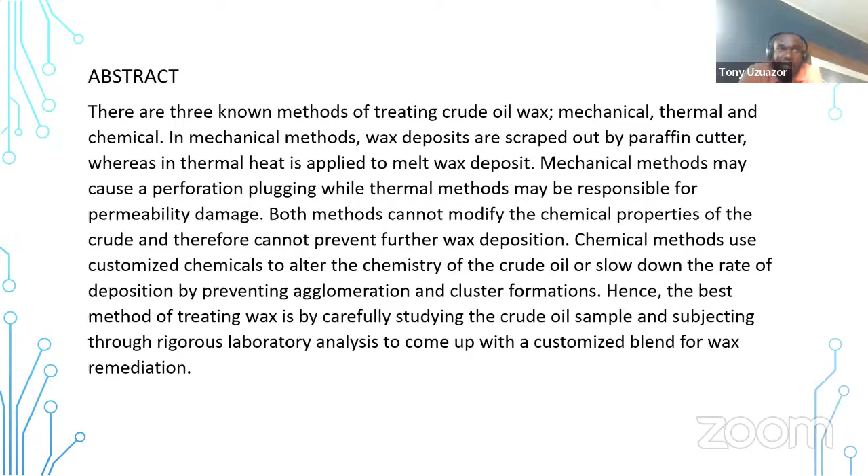Hence, the best method of treating wax is by carefully studying the crude oil sample and subjecting it through rigorous laboratory analysis to come up with a customized blend for wax remediation, which is what we do. Okay, so we don't just pour in our chemical, we do a lot of laboratory analysis on the crude sample to come out with a blend to treat the waxy well.

So for introduction, I wrote here, crude oil wax is common to the oil industry, and each year a lot is burnt on manpower and resources to curb it. Waxy crude presents significant problems and challenges during production, processing, storage, and transportation, which in turn affects profitability. The high pour point, viscosity and wax appearance often result in pipeline blockage, pump failures, and increased operating costs.

To mitigate these problems, we propose the use of a continuous customized chemical injection treatment program for the prevention and removal of oil wax in our wells. Our chemical treatment approach has been designed to improve the flow properties of waxy crude, simplify processing, reduce the risk of pipeline blockages, and increase productivity.

Our chemical treatment process is cost-effective, is efficient, and we guarantee that it will help improve the quality of your crude oil. Now, this guarantee we're going to see when Andrew comes up with our case study. You're going to see what we're talking about when we say we guarantee quality of crude and quantity also.

We have carried out extensive research and development, and our team of experts, which include petroleum engineers, flow assurance specialists, artificial lift advisors, expert chemists, and consultants, have years of experience working with waxy crude. Now, let me say this here also. So what we do is not just based on wax alone.

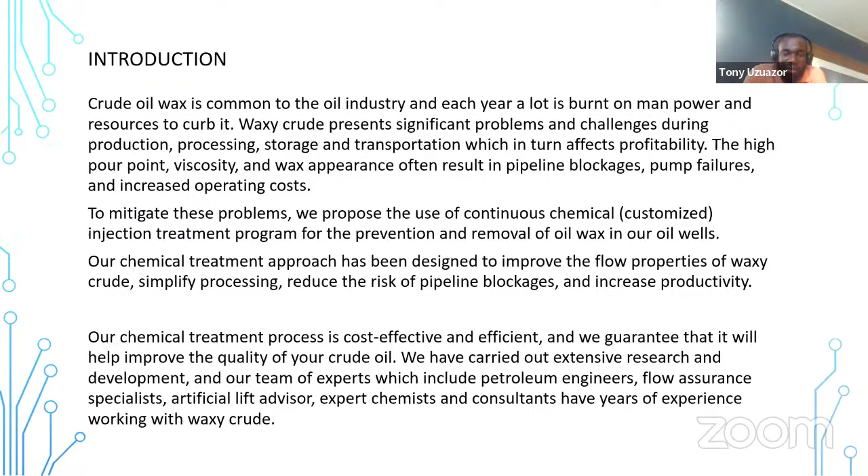Methodology. So I wrote here how we do it. That is what this is about, the methods we use. Sample collection. First, the waxy crude sample is taken from the wellhead or during drilling. Now, two ways we can take samples, either from the wellhead or during drilling.

During the drilling phase of the well, it could be maybe when you stop for DST operation, something similar to taking core samples during drilling. So we can have the sample of the crude oil there. We'll take it and subject it to a laboratory analysis. Taking samples during drilling gets us involved in the design phase.

Now, most of the wells we're going to talk about today are already drilled and completed. So nothing can be done except you want to pull out of hole and redesign. But when the well has not been completed, once we identify that it is a wax producing well, we can quickly come in the completion phase to input one or two completion jewelries that could help us easily mitigate wax.

So that's what it is. So the first thing here is to collect a sample. We'll take a sample, whether from the drilling phase or whether it's an already completed, flowing well.

We take a sample and then we send to our lab. Laboratory analysis: number 2. The crude sample is sent to a laboratory in the US for rigorous study and analysis. 3. Chemical treatment phase. A customized chemical is produced and formulated based on the results of the laboratory analysis for injection through a customized skid.

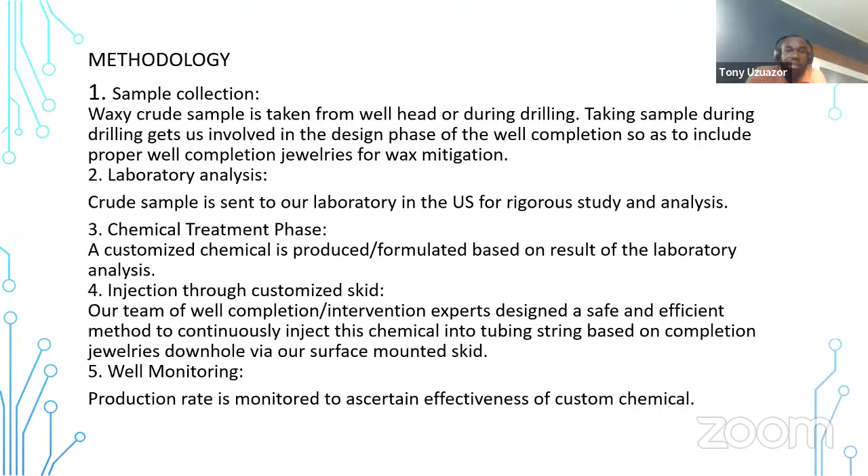So what this means is that we have a skid mounted on surface like a pump that gives a dose when we have decided which best method to use to deploy the injection process. The surface mounted skid gives a dose through whichever channel we decide to inject from. Well monitoring phase. Production rate is monitored to ascertain effectiveness of the custom chemical. The benefits of customized chemical.

One, cost reduction. I know there's going to be a lot of questions on cost, because I know people have their various ways of doing this. We'll come to that anyway. We have proof that it is cost effective. So in the long run, I wrote here, increased flow efficiency will lead to reduced energy consumption and maintenance costs associated with mechanical cutting and heating and insulation systems.

Also, by maintaining fluidity, expensive mechanical interventions like pigging are minimized. So a lot is going to be taken away from your cost of running your operation by the time we successfully install our system. Two, enhanced flow efficiency. By treating the wax and altering the rheological properties of the crude, the proposed chemical treatment program will improve flow efficiency, limiting operational interruptions and further reduce nonproductive time.

Okay. Thirdly, improved product quality. The customized chemical treatments will ensure the production of high-quality crude oil, minimizing the presence of contaminants and impurities commonly associated with waxy crude. This will positively impact downstream processes and increase the value of the final refined product.

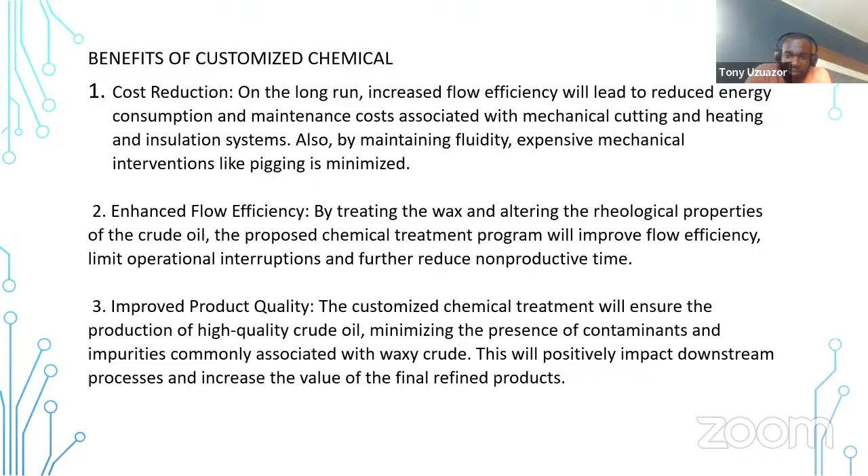Other benefits are listed below: capacity to dissolve the organic deposits, prevents gelling of oil in cold climates, acts as a good corrosion inhibitor, prevents wax agglomeration, makes heavy or viscous crude flow, I've said this before, makes it difficult for the precipitated wax to stick to the wall, has the ability to coat and create a surface film on the internal diameter and the outer diameter of the production tubing, thereby making it difficult for wax deposition to adhere to the wall of the tubing.

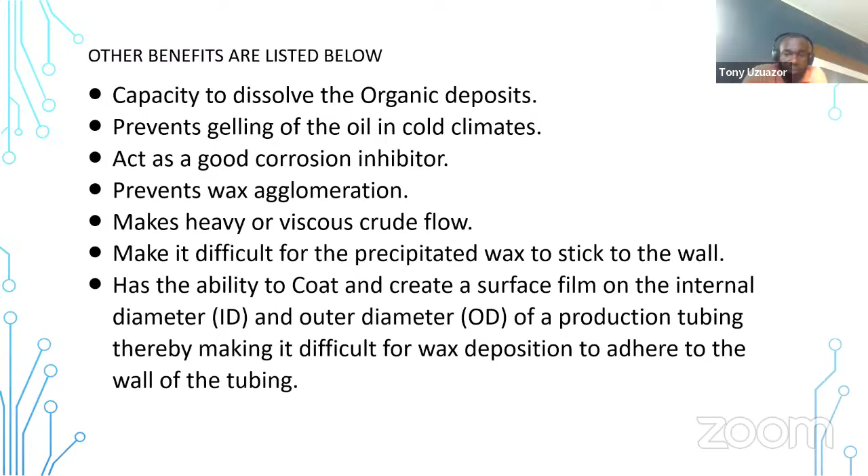So in conclusion, I decided to make it brief so that Andrew can come up and then we discuss, because it's supposed to be an interactive session where we ask all the questions and then we provide some answers as best to our knowledge. Conclusion. We believe that the best way to deal with wax, paraffin, asphaltene, etc. problems is to prevent them where possible.

To mitigate the formation of wax, paraffin, and emulsion, etc. problems, chemical injection lines have to be introduced from the design phase, thereby mitigating the cost of workover operation, wax cutting, and solvent soak. Chemical treatment of waxy crude offers an effective and sustainable solution to mitigate the challenges associated with wax precipitation during oil production and transportation. The proposed chemical treatment program, supported by laboratory analysis, pilot testing, and ongoing monitoring, promises to enhance flow efficiency, reduce costs, and improve product quality.

As we said before, a sample of the waxy crude oil is taken from the wellhead or during the drilling phase, sent for laboratory analysis, and a custom blended chemical is developed for the crude for the problem. So this is just a brief of it. I believe when we start asking questions we'll talk further on even areas that are not touched. But the whole idea is this. You have a waxy well, we'll take a sample of the crude, we'll send it to our lab. Based on the result of the lab analysis, we'll come up with a customized chemical that...

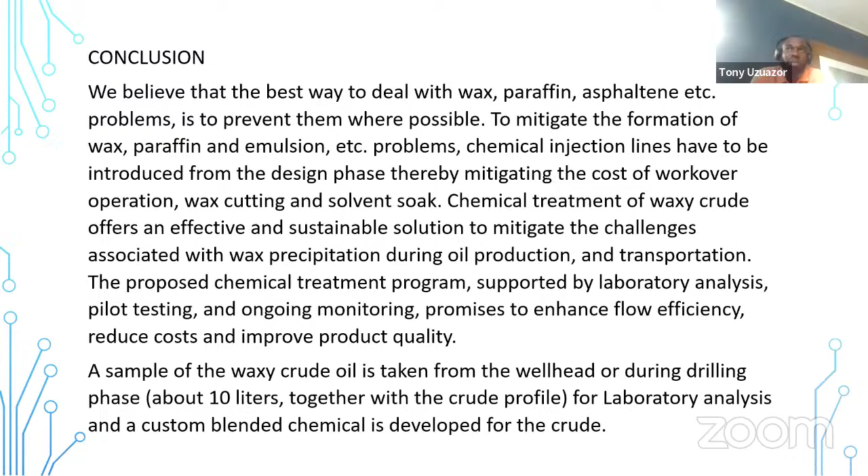It seems we are losing your network there. We are not hearing you very well, Mr. Uzuazor.

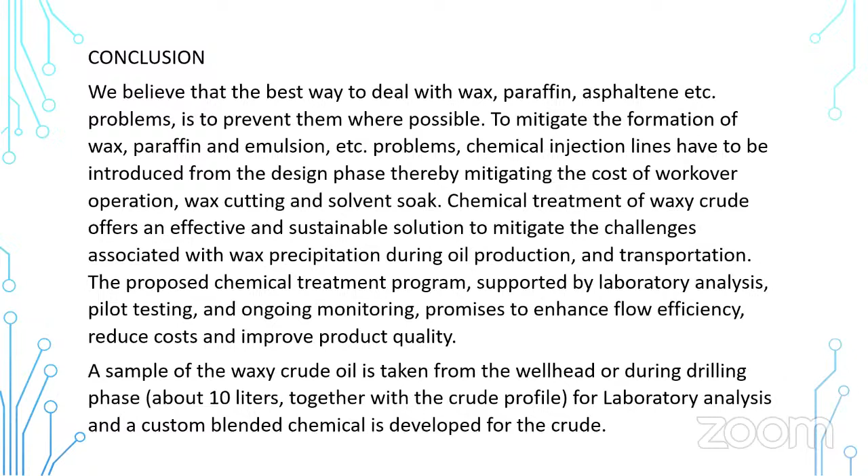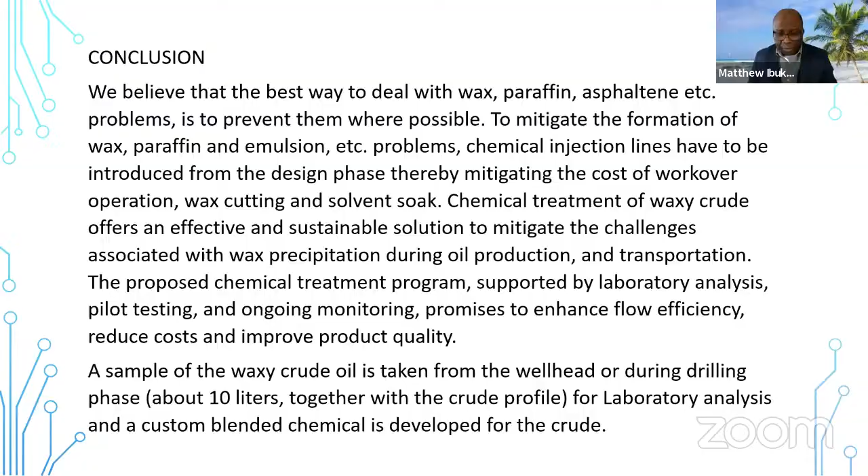Okay, I think Mr. Uzuazor has completed his presentation concerning the remediation of wax in the oil and gas industry using that method, which he has highlighted: the use of chemical injection into the wellbore. We want to have a section now of Q&A. And I wonder if, during this presentation, any one of us that has listened carefully has gotten questions that he or she wants to pose to the presenters for this meeting. Can we have such questions?

Or Tony, do you still want to say something? Okay, I think my network was shaky, but it's okay. So yes, I believe everybody heard the concluding part of it. I believe I did that, right? Yes. Okay. So let me stop there for Andrew to continue. Andrew, yeah, okay.

Andrew will take over for the case study we have worked on before. So let him use that to further buttress. Then we'll take questions and give answers. Thank you. Great. So after Andrew finishes, then we'll take questions. Our guys are also online waiting. All right. Thank you. Over to you, Andrew.

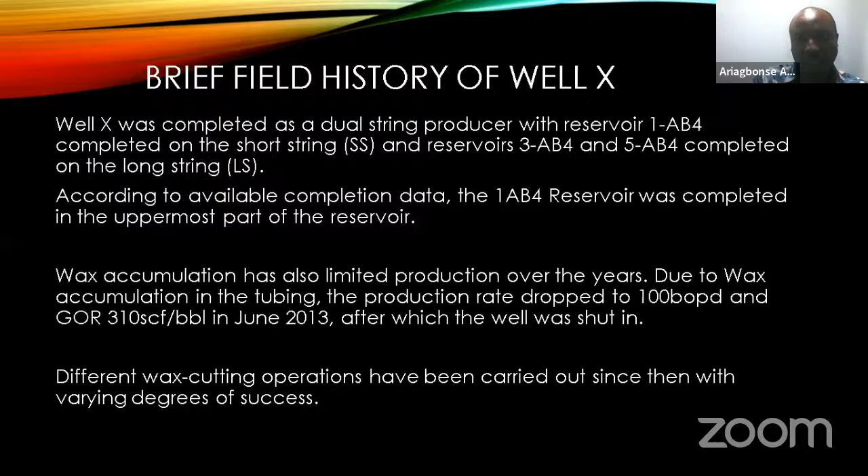Moving forward, this well has experienced wax over the years, and this has affected its production rate to the point that it dropped to 100 barrels per day, and the GOR to 310, all in June 2013. For a while, this well was shut down, then subsequently, at intervals, it was reopened. Our client has done a series of wax remediation with different contractors before, with a success margin. The well went from 100 barrels per day to 550 barrels per day, on choke 28/64.

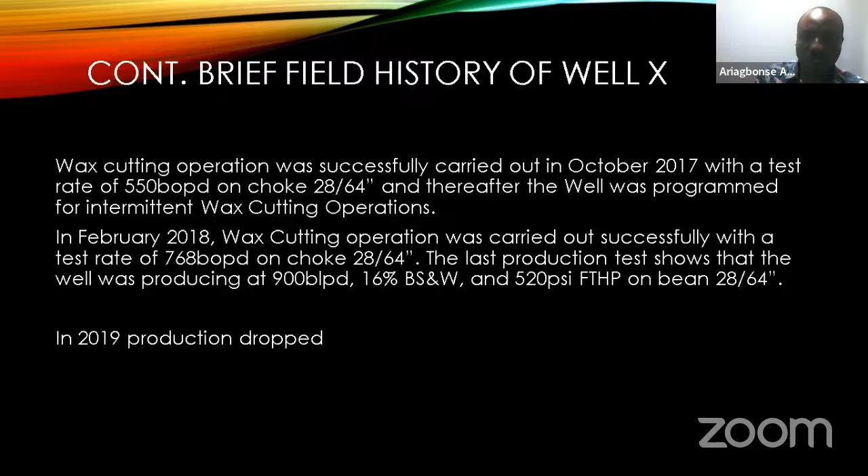The well was later placed on a intermittent chemical wax cutting operation. That decision enabled a slight increase in production rate from 550 to 768 barrels per day, still on choke 28, to 900, with basic sediment and water of 16%, flowing tubing head pressure of 520 psi, and the choke on 28/64. Still, the well had been producing wax after that time. At a point, they had to shut in the well, and that's how the trend went. Production later fell to way below 600 barrels of oil per day.

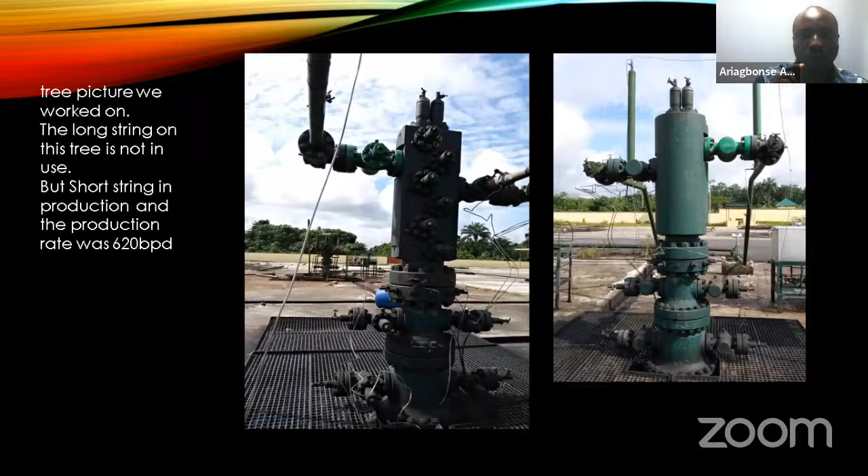Now, moving forward, at the point we did wax remediation on this well, we installed our device on this well. We were able to deduce the production per day on the short string, which is the 1AB4 that is in use, that had wax issues. So on the 1AB4, when we installed our device, we discovered that the production per day was no longer 900 anymore, but had dropped to 620 barrels of oil produced per day.

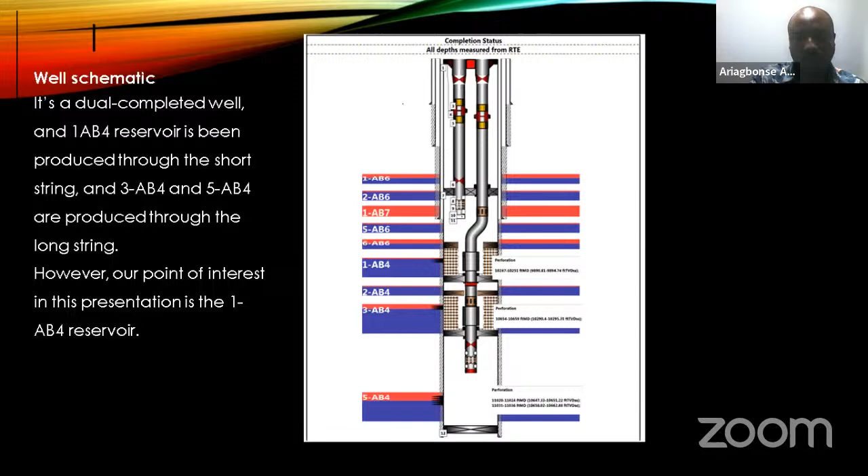So what we did was use this long string that's no longer in use. We have two barriers that we installed. We plugged off the bottom using our plug and prong, and also installed our selective tool to plug off from the SSD. So we have two barriers installed. Now, from the long string, we use it as our chemical injection point, thereby dosing our chemical through that point and treating the well. Now, this is work in progress.

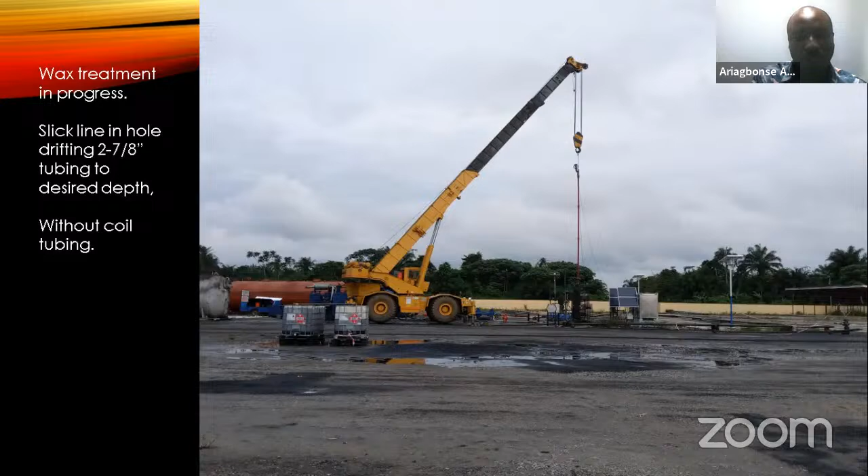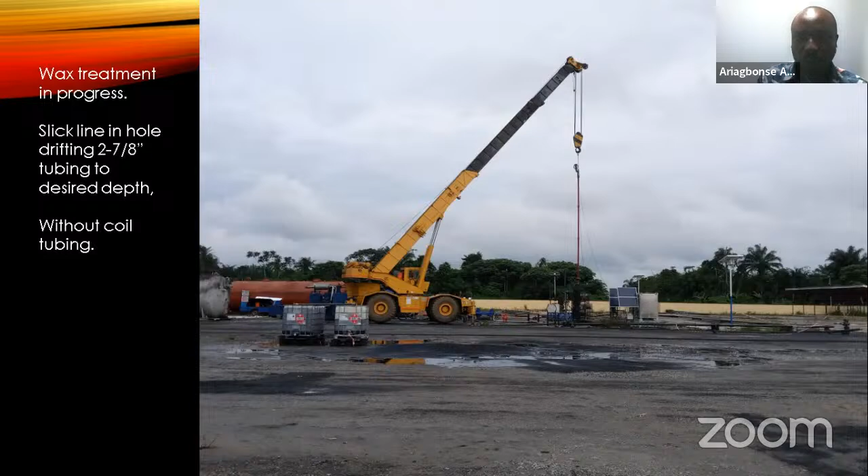Now, you can see that on this field, we did not use coil tubing at all. We were able to reduce the cost and also achieve our main objective, which is treating the well. We used slickline, as you can see.

Here's my mouse. You can see this aspect is the chemical injection skid that we built, and this place is where the client attempted chemical injection on the flow line, but still to no avail. At the point we did this job, on the valve very close to the client's injection point, we still found huge wax deposits. When we broke some of the valves that were there, we found huge wax deposits.

So moving forward, because of time, we treated the well using our chemical. We were able to get a sample from this well and send it to our lab technicians. They did a fine job studying the well and came up with a custom blend. When they came up with that custom blend peculiar to this particular reservoir, this particular well, this crude or the wax, we were able to achieve a very spectacular result.

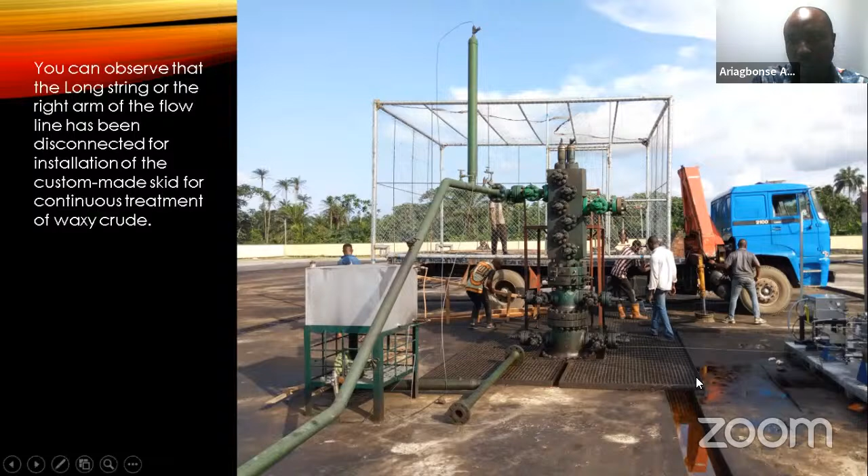Let me zoom in a bit into this. Can you all see it? Yes, we can see. Okay, now if you look at this well, we are able to look at our flow line that we use as this control line.

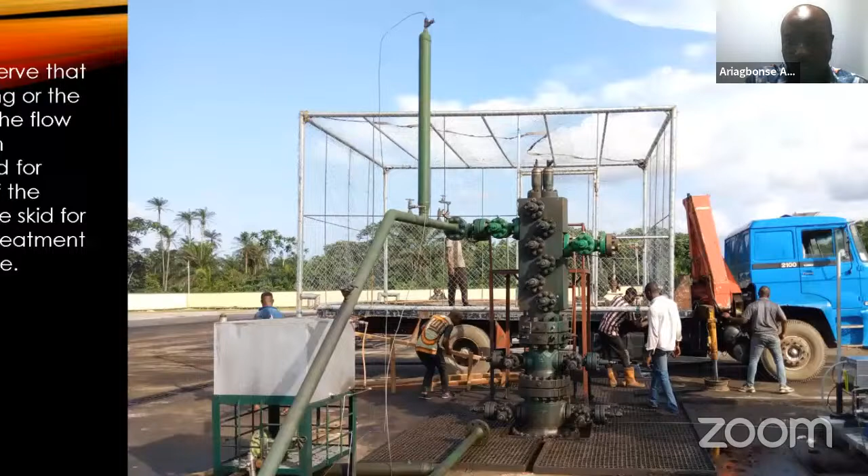Now moving forward, this is myself and one of my colleagues. This particular skid is an electric skid, custom designed to the client's needs. They requested an electric skid. What we equally did on this skid was provide a backup system for the pump.

We provided them with two different pumps. Number two, you don't depend on NEPA to provide power to the skid. We mounted solar and equally a diesel generator there.

Now the skid was designed with some safety features. What are the features embedded in the skid? We were able to put check valves, not just one, not just two. We had check valves on the system that were able to withstand 8,000 psi to the range of 10,000 psi.

So there is no issue of backflow, no issue of the well coming back on us or coming to the skid - it's well taken off. Also, to prevent the skid from pumping too much pressure on the line, we installed a pressure control device to reduce the pressure.

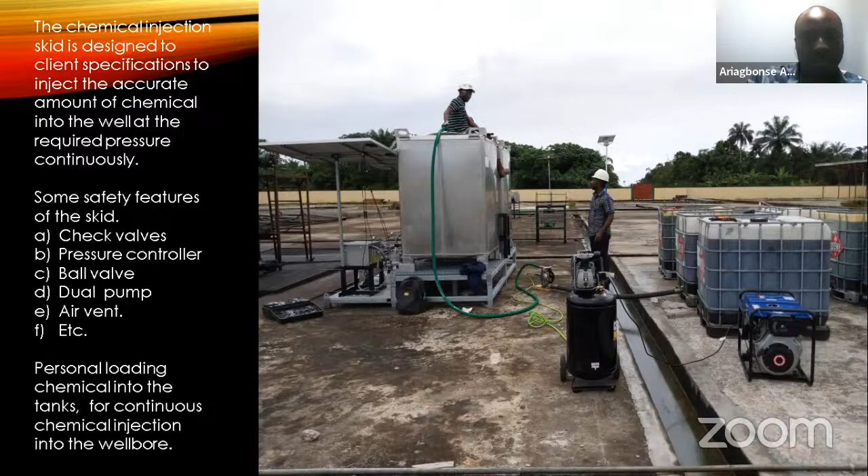On the screen now, you can see us putting on this barricade to prevent sabotage of the equipment, and also sabotaging the fine work that we did on this particular asset.

So let me go back on this particular asset. Once again, getting a sample from our client, we do a detailed and rigorous study on the wax on the crude oil sample that we get, and also come up with a custom blended chemical for that well, and provide a custom skid that will be able to mitigate whatever challenges the skid may find in whatever respective atmosphere we present, or challenges the skid will face.

So at this point, I will rest my case so that we'll accept questions from the audience. Thank you.

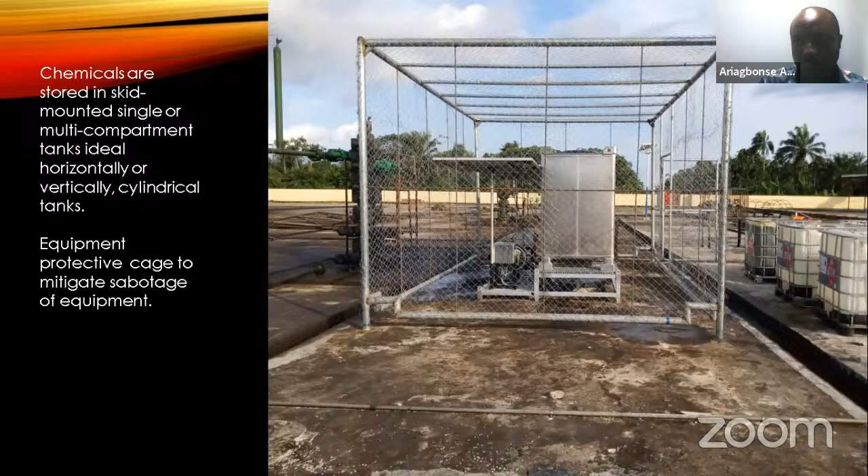Thank you, Tony and Andrew, for those two fantastic presentations. From this, we could see and hear and realize that wax is problematic in the oil and gas industry, and you have chosen to look into this and continuously mitigate the formation of wax in the oil and gas industry. Thank you for the introduction and the methodologies you have used to look into this and highlighting the benefits for the oil and gas industry.

For the case study we have just heard from Andrew, he has made it clear that the method of continuous chemical injection into the well has given good dividends, has given fantastic benefits to the client, moving production from 100 barrels per day up to 2,150 barrels per day. That is enormous.

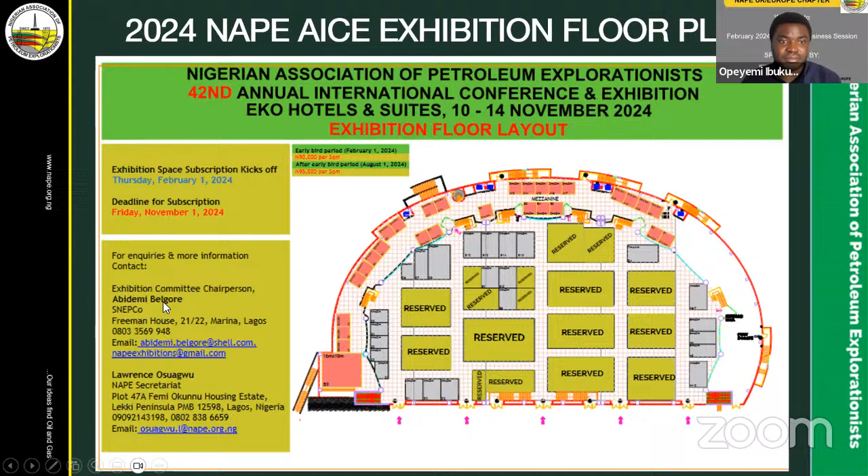As we've been told, you could write a paper and submit it, and the call for abstract is open. For the exhibition opportunities, that is also open. For companies looking at sponsoring or exhibiting, this is cost effective, around 90,000 naira per square meter. If you're interested, you can contact Mrs. Abidemi Belgore; these are her details.